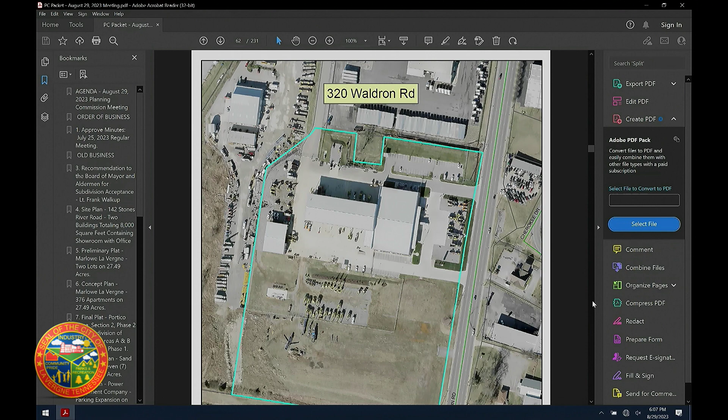Mr. Logan: This is a request for site plan approval, and this property is located on Waldron Road at 320 Waldron Road. You can see here on the screen the existing facility, sort of a T-shaped facility. There's equipment on display out front, and this site plan is only to expand the parking areas to the south of the building and also to add a loading dock roughly in this area in the front of the building. So they're not building any new structures with this site plan.

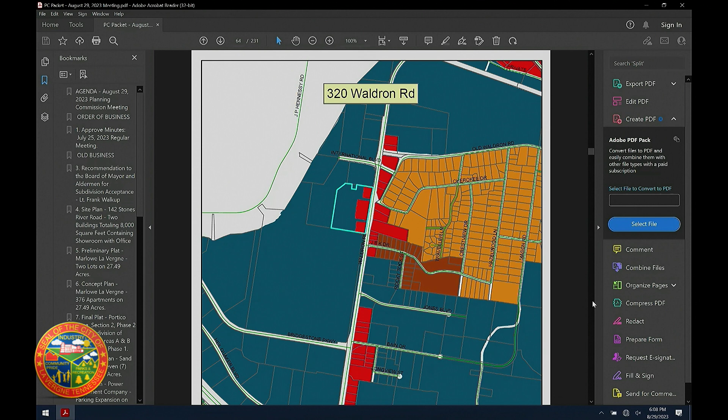And zooming out, you can see the property and surrounding vicinity, again outlined in blue. On the zoning map, the navy blue indicates I-2, which is heavy industrial, and the red is commercial zoning, that's C2. So this parcel does have commercial zoning at the front next to the road, and then industrial in the rear.

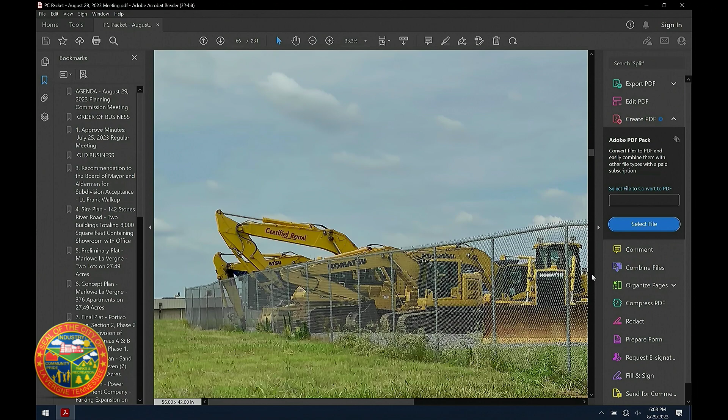Some photos of the site. You can see they have a lot of equipment that they deal with in their business day to day. They do have a lot of, from their site plan back in 2019, a lot of driveways and impervious surfaces. Here's some more equipment. And this is the front of the building, some of the equipment that's on display.

So moving on to the site plan, you can see on this screen the areas that this plan encompasses. Here's the parking area to the south that they are adding, and then the loading dock is shown here, this square, and this is, of course, Waldron Road running north and south.

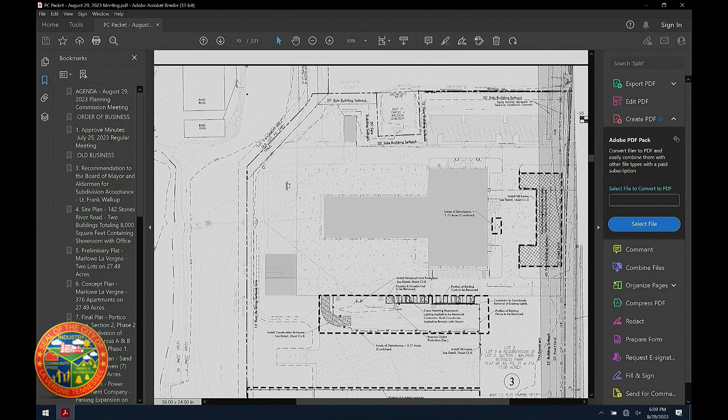And I do believe all the comments were addressed on this one. Yes, there's no outstanding comments from the workshop, so I'll turn it over to Mr. Lyde in case he wants to say anything. No, sir, I'm good. Does anyone have any questions? Make a motion to accept as submitted? Have a motion to accept as submitted. Is there a second? Second. All in favor? Aye. Opposed?

Motion passes. Moving on to number 10, final plat, 119 Cheney Boulevard, 5 lots on approximately 0.66 acres, requested by JTA Land Surveying Incorporated. Property located at 119 Cheney Boulevard, tax map 18P, Group C, Parcel 3, R3 High Density Residential Zoning District. This property is owned by Amir Angley, and this is deferred.

Moving on to new business. Recommendation to the Board of Mayor and Aldermen, rezoning of property requested by DSG Incorporated, 9.33 acres, property located at 31 Lillian Buchanan Drive, tax map 14, parcel 72, currently zoned C2 Highway Service Commercial Zoning District, proposed zoning R3 High Density Residential Zoning District. Property is owned by Richland South LLC. Mr. Logan.

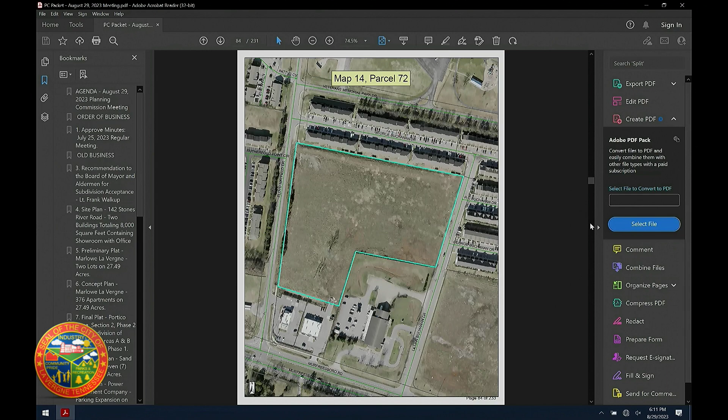So this rezoning request is just down the road here on Murfreesboro Road. This is 9.33 acres, and it's behind the La Vergne Post Office as well as the Dunkin' Donuts and Marco's Pizza. You see it there on the screen. So this is Murfreesboro Road at the bottom of the screen, and these are the Central Park Villas, the multifamily development that is existing. Zooming out, you can see Veterans Memorial Park and the ball fields to the north.

This property is currently zoned commercial, so it's C2, and the applicant is requesting R3, which is high-density zoning. They would like to pursue the development of a multifamily housing development. And this road here is Lillian Buchanan, and of course that's the post office here on the corner. So it is a large area, 9.3 acres, give or take.

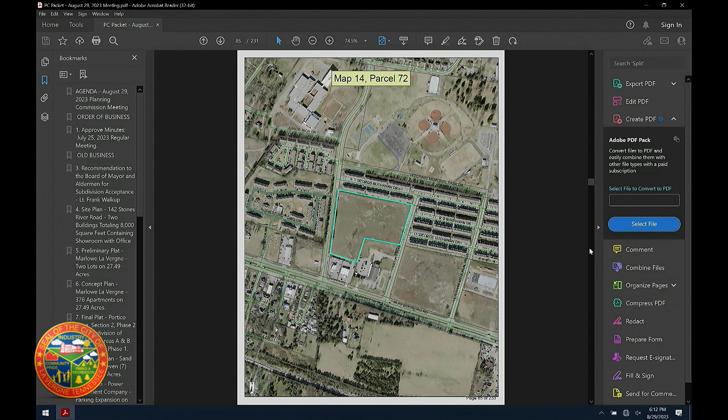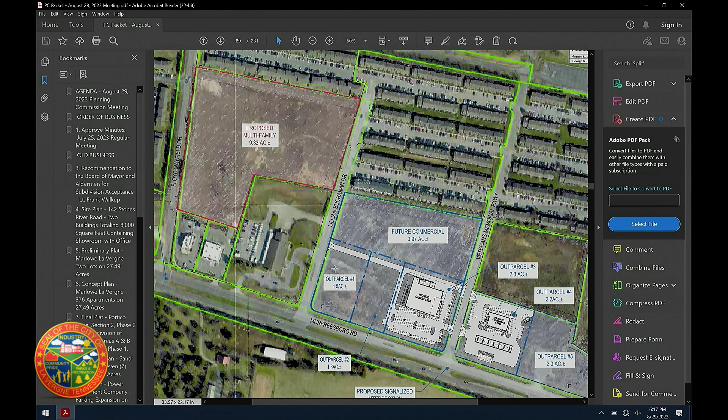Additionally, we would string it per city code, allowing greater ingress and egress. We're trying to accommodate an east-west connection through the multifamily property as well, between Floyd Mayfield and Lillian Buchanan, but that's yet to be seen as far as feasibility for design goes.

Thank you. Does anyone have any other questions? Nope. Okay, need a motion to approve or deny?

Motion to approve as submitted. It's not a motion to approve or deny, this is a recommendation to the Board of Mayor and Aldermen, so I need either a favorable or unfavorable recommendation. I make a motion for a favorable recommendation to the Board of Mayor and Aldermen. I'll second.

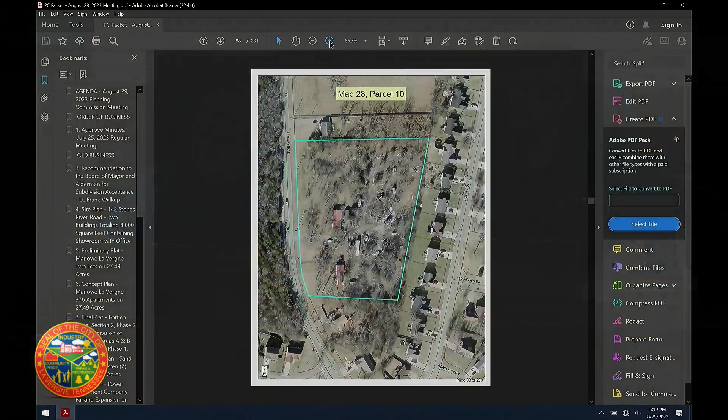This is a request for site plan approval for Chaney Place, which will include 50 new townhomes. On the screen currently is the property. This is Chaney Boulevard, north and south, and between Chaney and Summit Place, or Summit Lane, is the property. It's roughly 4.3 acres.

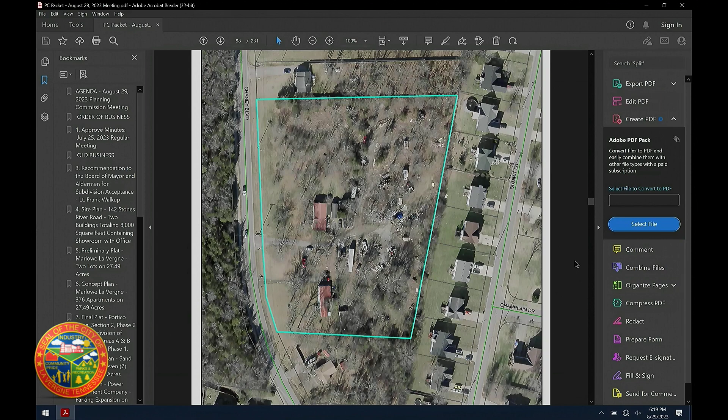There are two dwellings, and we'll see a picture of that in a moment, but there are a couple dwellings on the property that will be removed to make way for the new development. This property was rezoned about a year ago.

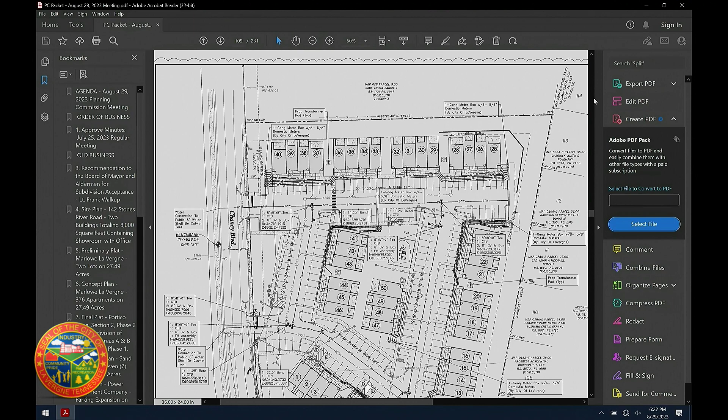There's no outstanding planning comments. I do see some comments, looks like from engineering, so I'll turn that over to Mr. Ladd.

Okay, the comments from engineering are mainly due to my getting a little confused on this one. They submitted a concept plan, and then this was a site plan. So one of my comments last go-round was that you need to submit a preliminary plat, because that's the next thing after a concept plan. We have subdivision regulation requirements for the concept plan, and then zoning ordinance requirements for the site plan.

So I've spoken with their engineer, and they do intend to sell these as individual condos, basically, so it is an individually sold-off thing. They did provide a preliminary plat, although y'all can't actually act on it since it's on the agenda as a site plan, I don't think. But their intent, as shown by this—could you go to sheet 107?

Okay, so their intent is to use the platting process solely for the dedication of the easements, and get their approval to build these things from the site plan. So based on that, the comments I've got are only comments on the preliminary plat, and they addressed all the comments from the site plan. If y'all look as confused as I am by this.

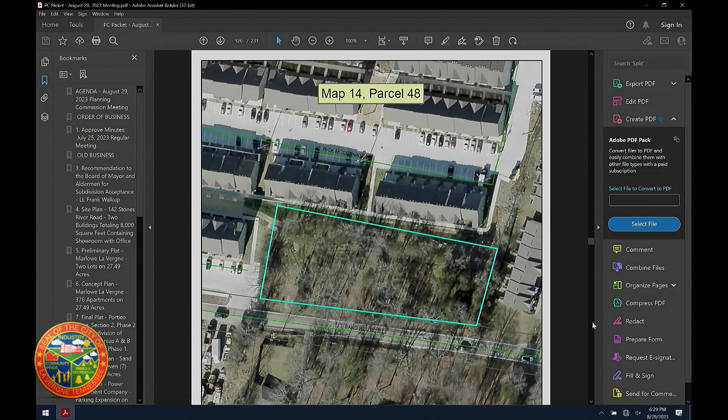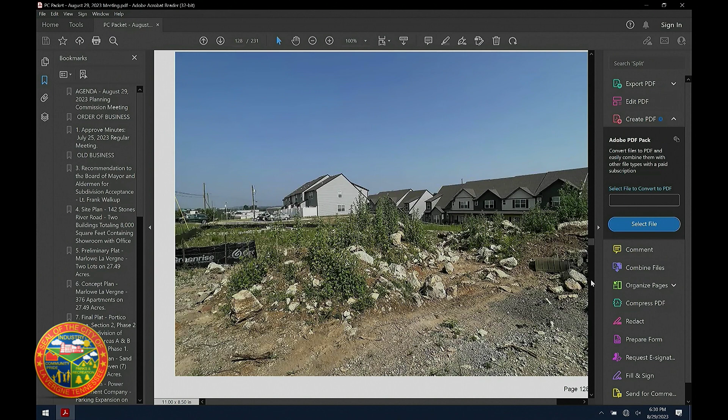And this is what it looks like today. After the previous plan was approved, the applicant did get a grading permit, started moving dirt and moving rock. So they installed a silt fence, which is in this photo.

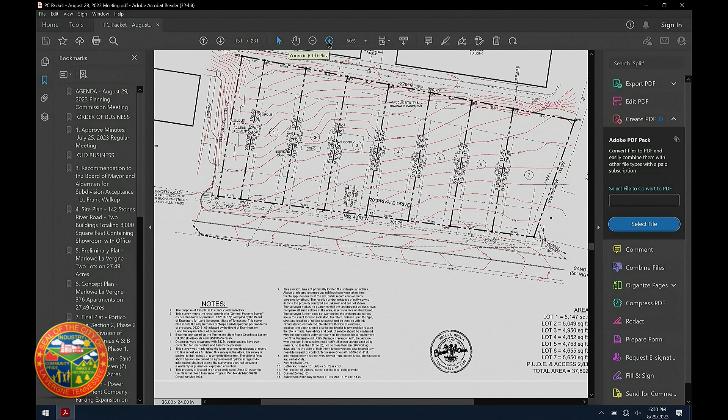So moving into this plan, you can see the layout of the 7 lots. They did install a private drive in the front because a particular concern was having 7 new driveways on Sand Hill with limited sight distance, so that was an issue. To overcome that, they've installed a drive in the front that would then serve each of the 7 lots.

And this plan has been here several months, so most of the comments have already been addressed. I don't believe there's anything outstanding from planning or engineering, so that... Well, I just want to address something. Mr. Lott does have one comment. If you could go back to 131 out of 231, please.

You're at 109 now, so go way ahead. More. There you go. All right, so I talked to the fire marshal, Curtis Brinkley, and his comment about the

fire department access is still not acceptable. He meant to take that off. Because what they have done is they have added a second entrance here. They have an entrance as far into the straightaway as they can get it, and a second entrance right at the high point of the road, which is the best place to put it if you're in this area. So that is less than 150 feet, so it now meets the NFPA requirements.

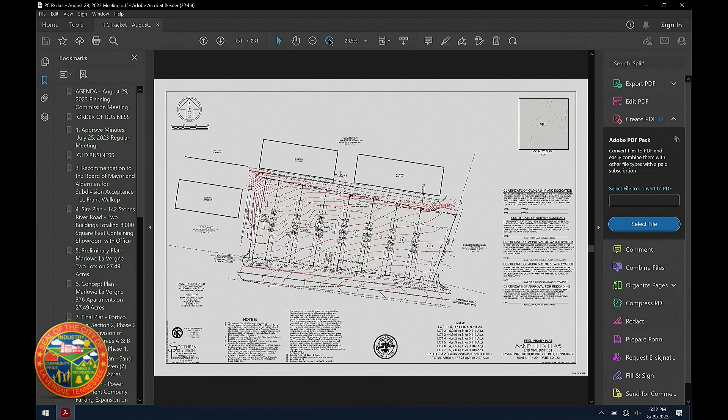So there's a couple of minor comments left about which of the 2 water lines in front for them to tie to. They'll work that out with Scott Tatalovich. But they do have water service, and they do have sanitary sewer service. Entrance 1, entrance 2 meets the fire marshal's comments.

Okay, do we have an applicant here? Name and address, please. Good evening. Brian Hamilton, Nashville Civil, 751st Avenue, Nashville, Tennessee.

Okay, so just for clarification, first we're going to be dealing with a concept plan. Does anyone have any questions about that? This will be number 8 in your packet. Any questions for staff or the applicant on the concept plan? If there's none, we need a motion to approve or deny.

Mr. Chairman, just have a couple of questions. Now we'll jump to that. So on the concept plan, what is the width of the driveways? It doesn't appear to be indicated. 20 feet is the easement for the

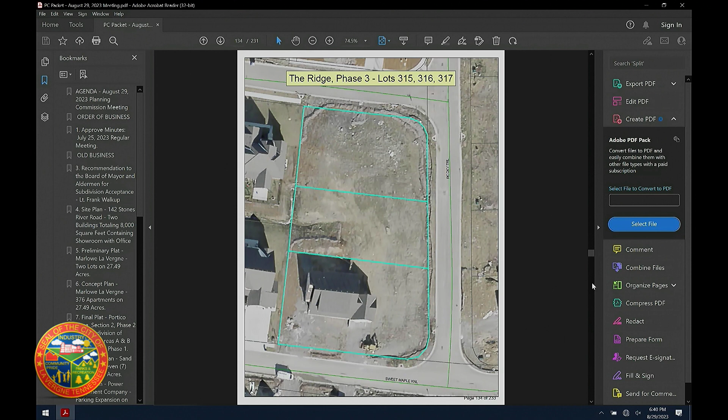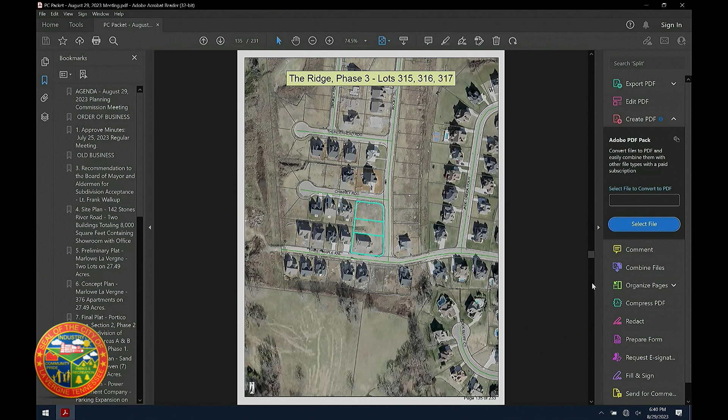This is a photo from Rocky Trail and Chimney Ridge. And zooming out a little bit further, you can see the existing homes that are fairly new, and then the vacant corner here is the area that we're talking about.

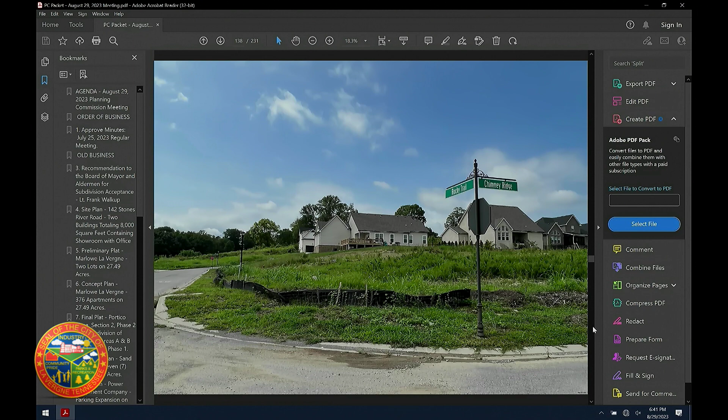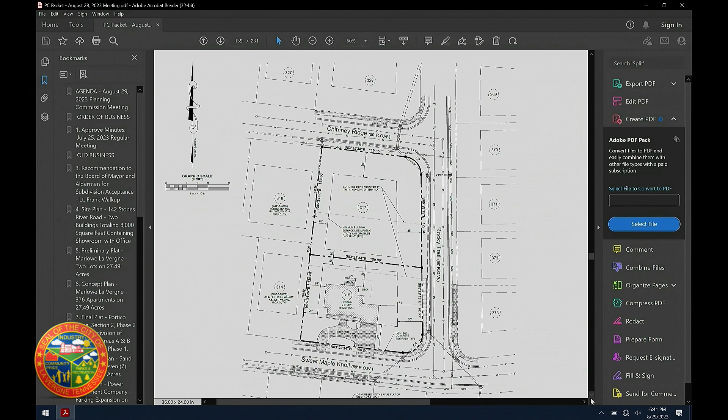This is the plat submitted by the applicant. You can see here in the middle is where lot 316 is today, and it'll be eliminated after the lots are combined and the plat's recorded. There's no technical comments remaining on this project, so this completes the report. Thanks.

Mr. Chairman, with all the items addressed by staff, I make a motion to accept as submitted.

I've got a quick comment before. Go ahead. The homeowner, Anthony Trimboli, approached me while I was doing a little gardening. He indicated this came about because when he purchased the home, he had talked to Michaels about putting in a pool, and after all was said and done, they realized that with setbacks and all, the pool would not have fit. So Michaels, in order to make nice, decided to resubmit and change some lot lines to give him a little more room for his pool. That's why we're at this place. Of course, by giving Mr. Trimboli a little more room, the other 2 lots would be a little bit small for the neighborhood. Still, it's something the neighborhood wants, and it's a good thing, so I will second your motion.

Okay, we have a motion, we have a second. All in favor? Aye. Opposed?

Motion passes. Moving on to item 15, site plan, 84 Lumber, create additional storage yard on 42.45 acres, requested by SEC Incorporated, property located on Wheeler Street, tax map 18K, parcel 13, I-2 Heavy Industrial Zoning District. This property is owned by 84 Lumber Company. Mr. Logan: this is a request for site plan approval at 84 Lumber.

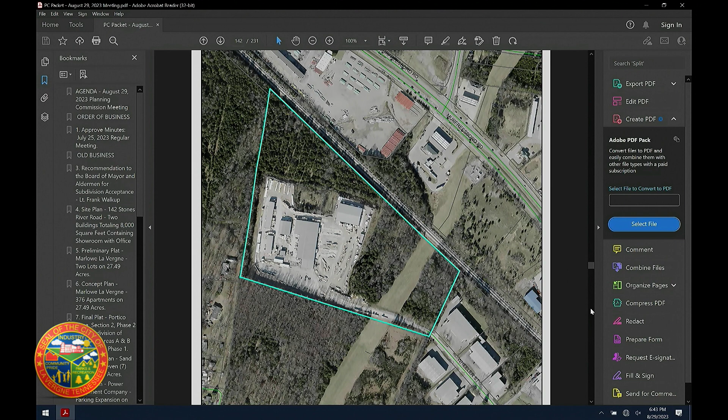On the screen, you can see their existing facility at the end of Wheeler Street. This is Wheeler Street near the bottom, and this entire area is 84 Lumber. There are quite a bit of trees and forested land around the site, and as you zoom out, you can see just how large of a facility it is, especially with the surrounding pavement and gravel areas.

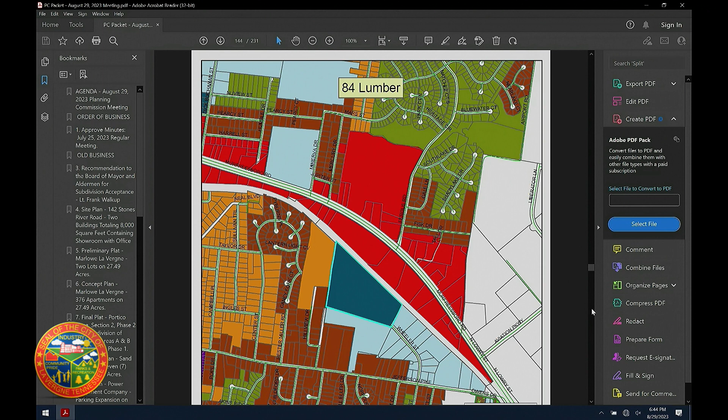This is Walmart for comparison to the north, and this is the Walmart parking lot. So it's not quite as big as Walmart, but it's approaching. The dark blue is I-2 Heavy Industrial, and the light blue along the rest of Wheeler is I-1 Light Industrial. The Heavy Industrial is where 84 Lumber is located currently.

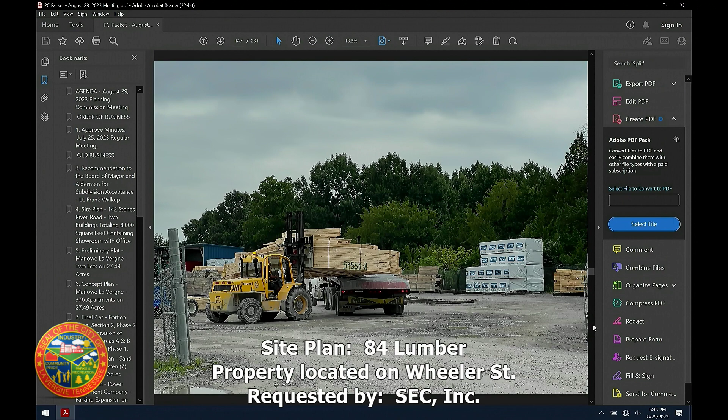The purpose of this site plan is only to build a storage yard. They're not building any buildings with this plan. This is a closer view of the site plan. Off to the top left is the existing building and the other facilities, and this shaded area is where they would like to build the storage yard. Down at the bottom is where Wheeler Street ends and the 84 Lumber property begins.

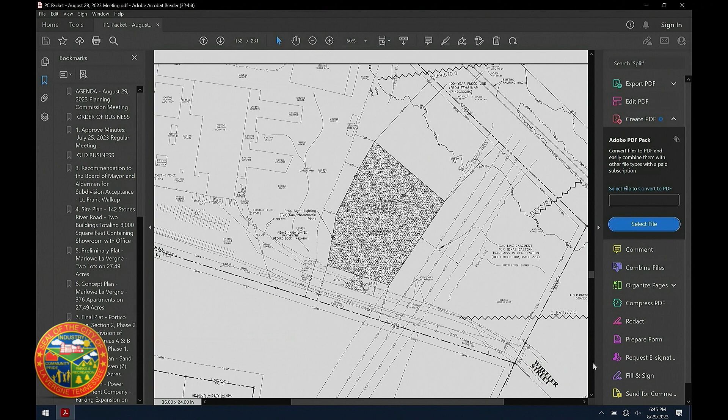I think all the comments have been addressed on this site as well, so that completes the report. Thanks. Okay, anyone have any questions?

If not, I need a motion to approve or deny. Motion to approve. Have a motion to approve. Is there a second? Second. Have a second. All in favor? Aye. Opposed? Motion passes. Moving on to item 16.

Preliminary plat, Arbor Ridge, sections 1, 2, and 3, 95 lots on approximately 32 acres, requested by SEC Incorporated, property located off Waldron Road, tax map 32, parcel 4, PDR Planned Density Residential Zoning District. This property is owned by Starlight Homes of Tennessee, LLC.

Mr. Logan: this request is for preliminary plat approval at Arbor Ridge, sections 1, 2, and 3, as you can see on the screen. This is Rock Springs Elementary School at the bottom, and this blue line goes around the perimeter, about 214 acres, give or take. These sections for Arbor Ridge will be located roughly in the middle of this 214 acres and to the south of the middle as you go toward the intersection of Lake Road. Zooming out, you can see we're talking about this area, all south of Blair and east of Waldron. The property is zoned Planned Density Residential.

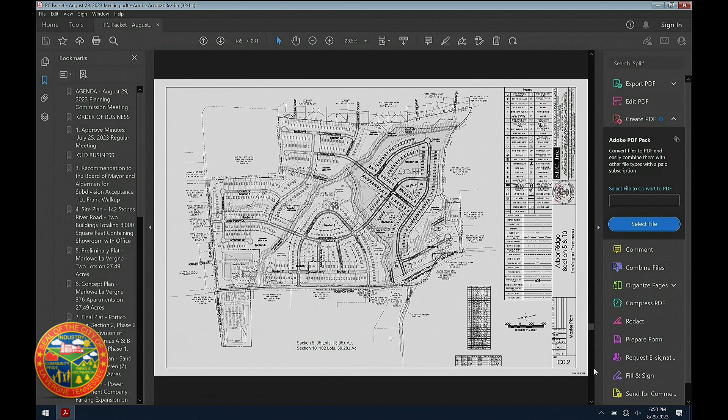These sections are close to this area as well. So this is the entire master plan that was submitted by the applicant.

And you can see this is section 5 here, and then 10 is a little bit further up in this image. North is to your left in this photo. So these are pretty far down to the south of the entire 214 acres. They're on the southern border of the property.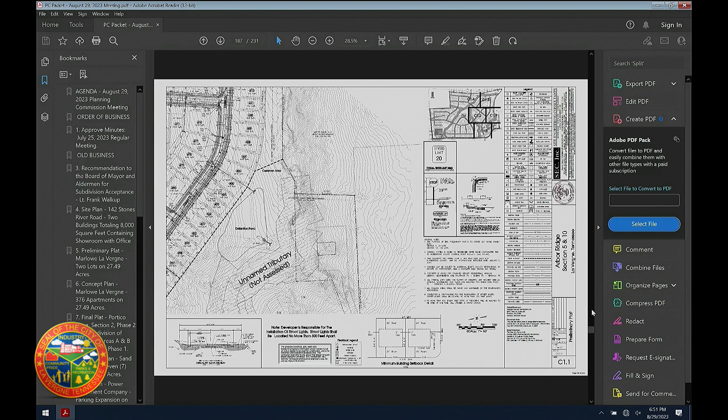And there are some detail sheets that show the lot layouts and the arrangement. All the lots in this development are still proposed to be between 41 feet and 50 feet wide, and that was approved with the original design book when Arbor Ridge passed. There's no outstanding comments that I'm aware of, and engineering has none, so that completes the report.

Anyone have any questions? Need a motion to approve or deny? Motion to approve. Have a motion to approve. Is there a second? Second. Have a second. All in favor? Aye. Opposed? Motion passes.

Moving on to final plat. 5486 Murfreesboro Road, lots 3 and 4. Combined 2 lots to total 1.96 acres, requested by James Lukens. Property located at 5486 Murfreesboro Road, tax map 18B, Group E, parcels 5 and 5.02, C2 Highway Service Commercial Zoning District.

This property is owned by Jemsid Shafari, Jemsid Mohibi, and Payman bin Rousey.

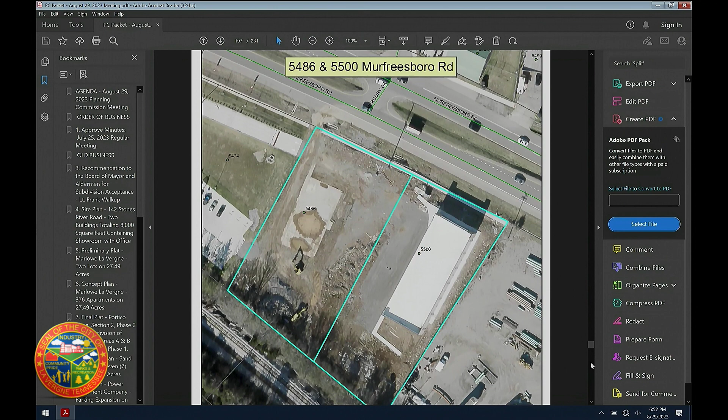Mr. Logan: So this is a final plat request for approval at 5486 and 5500 Murfreesboro, and this plat would combine these 2 lots. So roughly a year ago, last summer, we met with the applicant, and they had designed a building, but the property line was an issue. I think part of the building was on top of the property line, so they had to rectify that, and the way to do that was to combine these 2 lots.

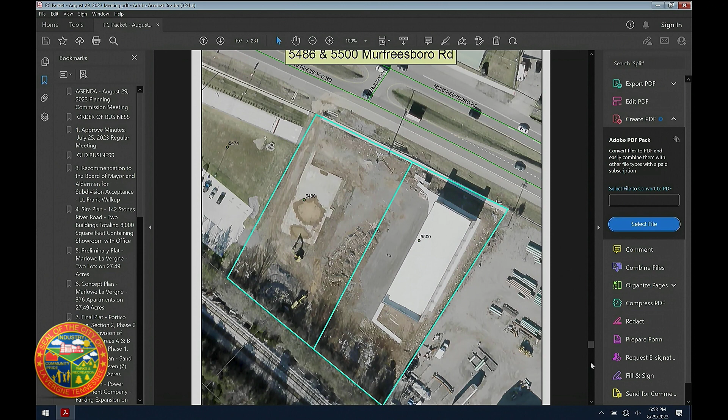So we'll have a photo in a moment of this building, but this is the building that most of you know started construction around, I think it's June of 2019, and a lot of the building's complete, but they never did finish everything, and it's not 100% complete. So some people refer to it as the building that's been under construction for 4 years, and that's probably accurate also.

The new building that you'll see in the site plan will be pushed to the rear and further away from Murfreesboro Road. It gets closer to this railroad track. You'll see that in the next item. But currently, these are the lot lines.

This blue, the existing 5500 building is on its own lot, and then the older storage building, it was kind of dilapidated, run down, but they did demolish that a couple years back, and that's what you're seeing there is the leftover slab from that old building that was torn down.

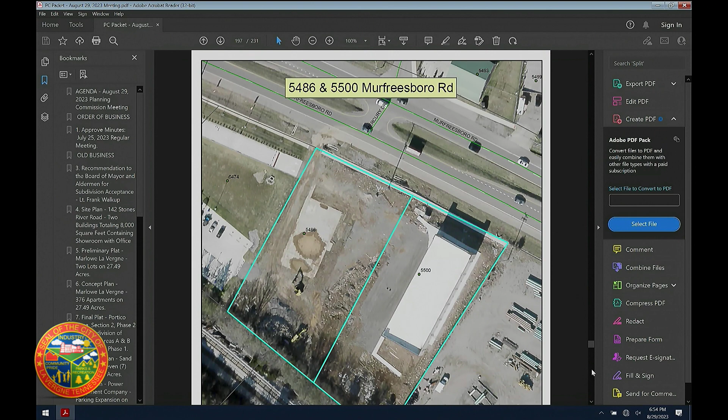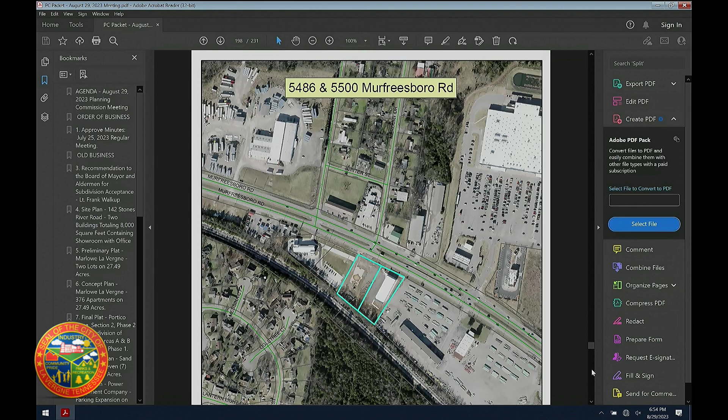So zooming out, of course, this is basically across from Walmart, and this is Washtopia, the neighbor just to the north and east. And zoning map, everything here is C2, highway commercial.

Okay, so this, and we'll see this again in the next item for the site plan, but this is the existing building that's not finished. They've still got several site improvements to make, some water and sewer utility issues and things that are not complete, but this is what's out there today, and that's what it looks like.

So this building, Murfreesboro Road is just off to the left, out of sight, but this building is turned so that the side is actually facing Murfreesboro Road, and then the actual front is at a 90-degree angle to Murfreesboro Road.

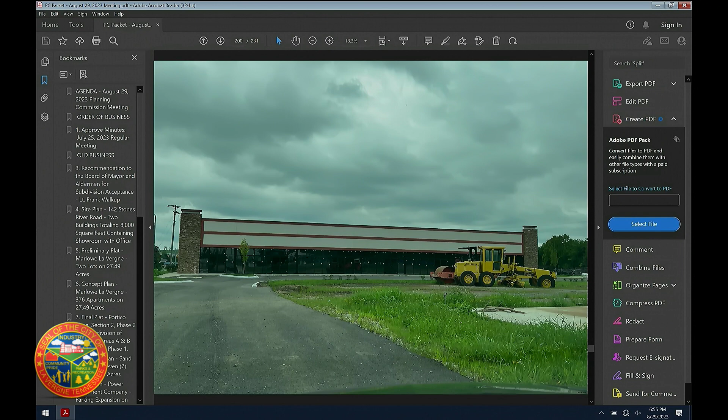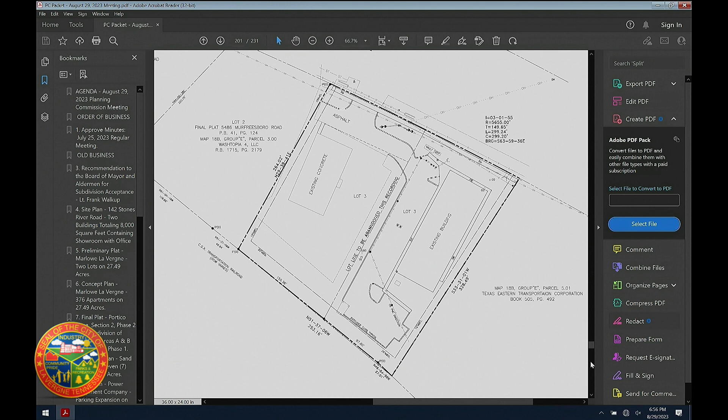So the plat submitted is fairly simple, just shows lot 2 or lot 3, and shows the existing building and the existing slab of concrete. This line will be abandoned in the middle when the plat's recorded, and it'll be one parcel ready for the new building. I don't think the plat has any comments, so that's all for the report.

Thank you. Anyone have any questions? I still have to say, from the workshop we discussed, my concern is the roadway not lining up with the entranceway from the proposed building, which will give some concern for traffic. I still have a concern about that. Yes sir, that'll be discussed in detail on the site plan. This is just the consolidation plat, so any questions about the consolidation?

Is the applicant here? Yes. You can come up and state your name and address for the record, please. Jim Lukens, Lukens Engineering, 256 Seaboard Lane, Franklin, Tennessee.

All right, just refresh my memory. In the workshop, is the building going to be, let's say, of similar style and look to the existing building, the second one that you're building? It complements the existing building, and it'll face the street, so the retail will get a lot more visibility.

Okay, all right. And I have some elevations here. Okay, great. I brought in also have materials for it. I was going to wait till next time. I'll go. Yeah, that will be addressed with the site plan. Gotcha.

Does anyone have any questions on the consolidation? Nope. Okay, need a motion to approve or deny? Make a motion to approve. A motion to approve, is there a second? A second. Second. All in favor?

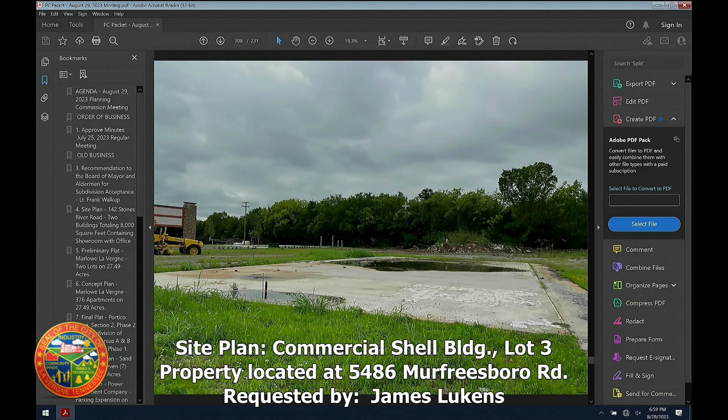I won't go over all the site since we just did that, but I will show you the building again. So this shows the old slab of the building that was torn down, and you can see just barely visible is the corner of the existing building. And then this is the site plan that the applicant is proposing. In this plan, you can see the existing building here and new building here, and they'll roughly be at right angles to one another with parking in front of both buildings. I'll turn it over to the architectural discussion and the parking discussion.

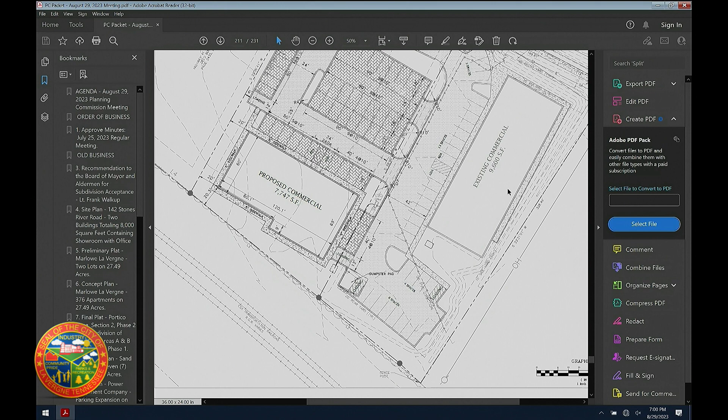Okay, well, I'll take that. We'll jump on one real quick thing. It's hard to see on the plans, but this dumpster pad here has been revamped. That's a new wall. That loading area is not there anymore, and there's room for 3 dumpsters. Could you please, Bo, go to 213 of 231?

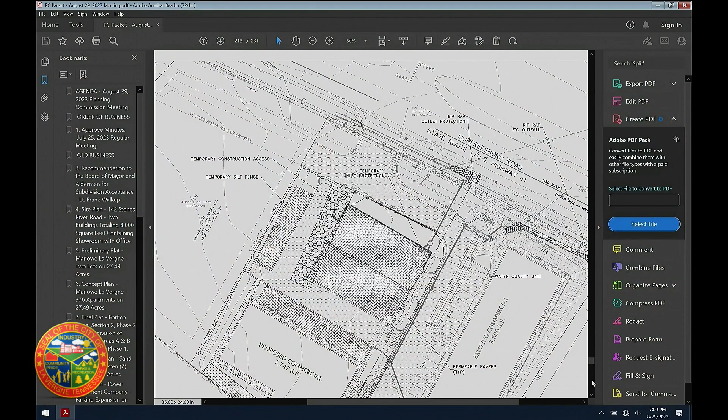Okay, the engineer—that big old long list of 20-some-odd comments that I had—he did get all of those addressed. However, there were utility comments that are outstanding. The problem is the utility plan. 215, sorry, told you the wrong number. There we go. Right. Is this it? Yes. All right, so they've consolidated these into a single lot, which by our Public Works utility standards can only have one service. They have the existing service and a new service shown, so the plans are not yet to a state that we could build them as drawn.

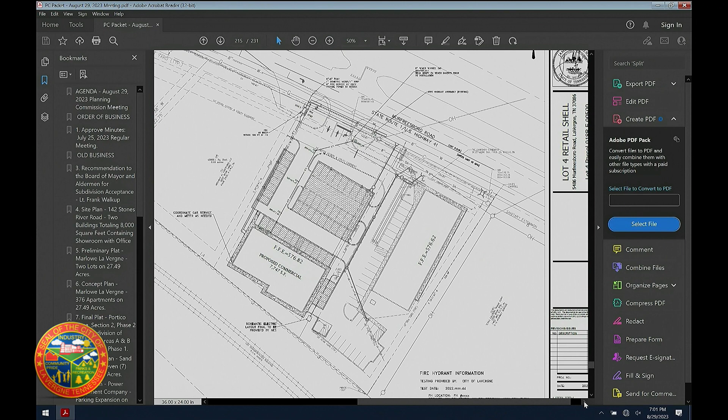Now, in terms of the lining up of the driveway, I discussed that with Mr. Lukens, and he has brought some additional information, and he would like to talk with y'all directly about that. Sir, if you'd please come back up, name and address. Okay, Jim Lukens, Lukens Engineering, 256 Seaboard Lane, Franklin, Tennessee. If I can pass this out, it's an alternate plan.

As I said before, we had looked at different options for the parking layout, and it was specifically brought up at the technical review meeting a few weeks ago. This layout aligns the incoming traffic lane with the driveway straight across, and requires an angle on the parking.

I prefer the one we've got in the application, but I want to let you know this option does work too. It's really a preference of which one would be preferred. I like that the other one has more parking, and I think it's a little less confusing for people coming out of the parking area, but this option does align, which addresses the comment raised at the meeting.

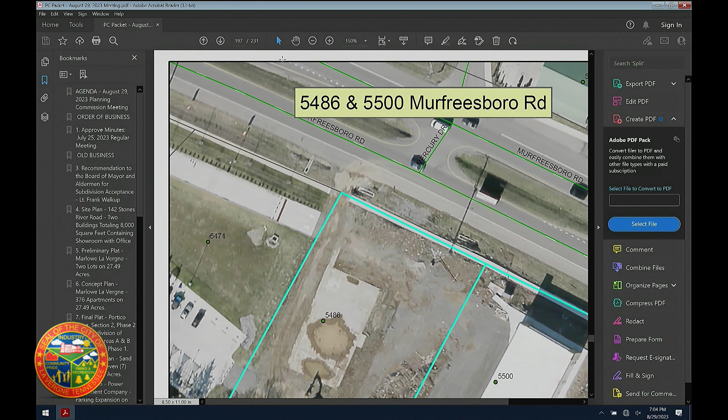Oh, okay, yeah, you can see that stub there with the car wash. Are you talking about in the back of the site? Yes. The original plat was approved with the 4 lots all having shared access in the front. There's no shared access in the back, so I don't know why they terminated that. I think it might just be a dead end, but there was never an intent to combine the two. I wasn't part of the commission back then, so I don't know what the thought was.

So this is for Gary, just a question. The parking lot, they're going with pavers—so the existing car park already made for the present building has been blacktop, and now they're going with pavers? Yes sir, for this one they're going with permeable pavers because it does the filtration and detention at the same time. The presently constructed building had underground detention. So it's two different types, but they both fall within our approvable BMPs.

Gary, have you had a chance to review the alternative? Yes sir, I have, and I have no problem with it. But again, if you gave approval tonight, it would be a contingent approval because the utility plans are not buildable. So I just want to remind you of that. I just didn't know if you had seen this yet or not. Yeah, Mr. Lukens did show that to me, and it's fine.

Do you want to speak to the utilities as far as those being outstanding? Sure. Really, it's basically because the lots are combined, we can only have one service into the site. I believe one of the comments said there's a stub out at the existing fire domestic meter, so it's just a matter of putting our backflow over on the combined lot line area of the project, appropriately backflowing it, and then running our service to the building. It's an easy change to make.

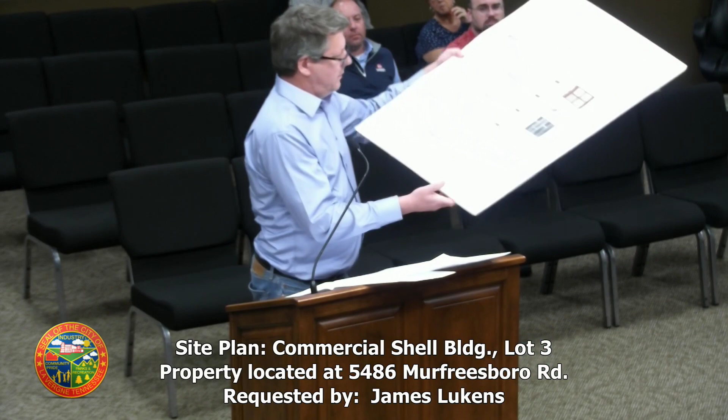Or not the utility, the elevations? So the board, I don't know if you look for the board, but it's right in front of you. The brick is here, it's on the columns, and then that's brick.

The glass will be a darker colored glass, similar to the existing building. There's two shades on the top, where as tenants move in and put signage up, they'll place it there. And then there's a kind of stonish dry cast, I guess is what they call it, that'll go here and along the top. But the dark color is only on the columns.

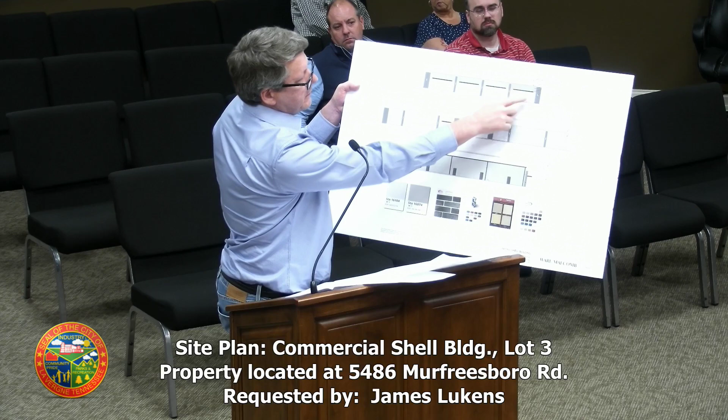That had me concerned that we were just building a solid black building. Right, that would not be aesthetically pleasing.

Before there's any motions for anything, I think we need to figure out, with the alternative and the proposed, what everyone prefers. Terry? I like the alternative, the one that was presented. Graham? Alternative. Carol? Alternative. Jim? Alternative, yeah, the alternate. Okay, I think everyone's looking at the alternative.

But we still have some items outstanding, and this board traditionally has been very anti-contingency, so I'll make a motion to defer this to next month. This way it gives you time to work on this. Is there a second? Second. All in favor? Aye. Opposed? Thank you, sir, we'll see you next month.

Number 20, recommendation to the Board of Mayor and Aldermen for subdivision acceptance, Portico Place, Section 2, Phase 1, property located off Blair Road, requested by SEC Incorporated, PDR, Planned Density Residential Zoning District. Mr. Logan: so this is a request for subdivision acceptance at Portico Place, Phase 2, Section 1.